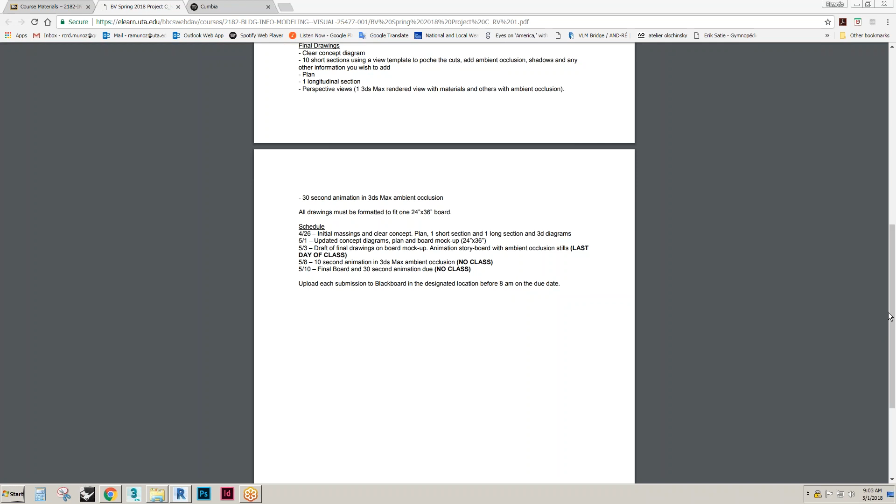Yes, okay. So I knew this was going to happen - I knew the final project was going to be affected by the studio project, because it always does every year. So if you look at the schedule, let me zoom in some more.

What I think I'm going to do is, since today's the first, I'm going to move this to Thursday. And then on the 8th, you'll have this and this due. So we're just moving that back, and I'll update the brief online - Kaylee can't hear.

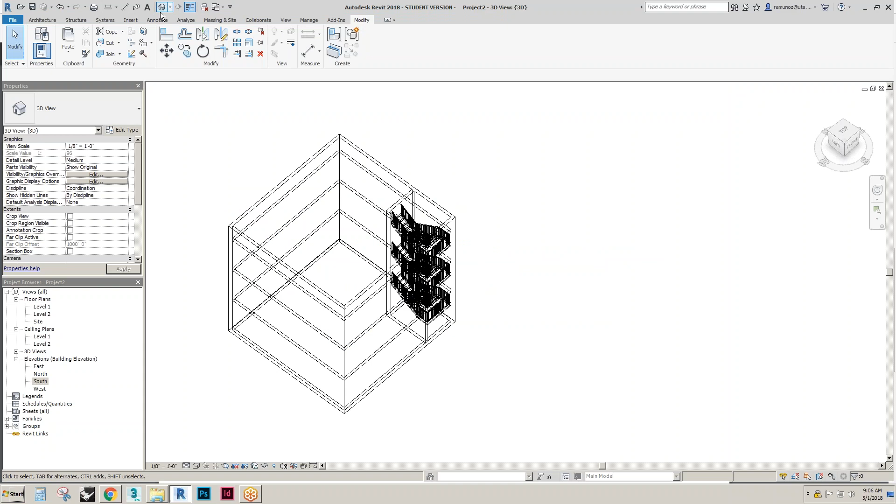So today I just wanted to go over really quickly two things that will come in handy. You don't have to model this - you can just watch what I'm doing.

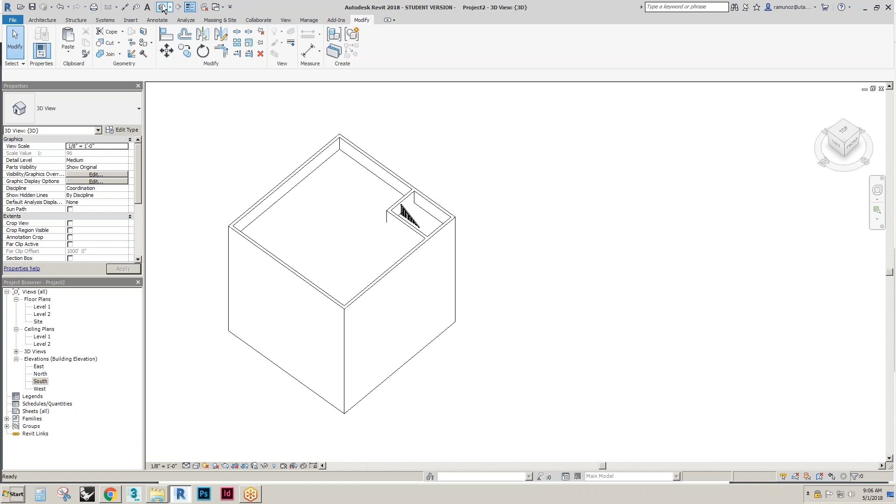So I just built a 4-story building, and it has stairs and 4 walls. It's actually a 3-story building with a 4th as the roof.

But I've been talking about diagrams, and I've been wanting you to create diagrams of what your projects are. If anyone's heard of Bjarke Ingels before, Bjarke Ingels Group, BIG - they do a really good job of explaining their projects. I feel like their projects are very simple, but they achieve simplicity, which is really difficult to do, and their diagrams are very clear.

This is their website, and these are all the projects and the years that they've done them. Let me find one that I know has some good diagrams - most of the projects have one. I don't know if you've seen this project on ArchDaily - it's like a waste treatment factory that also has a ski slope on top.

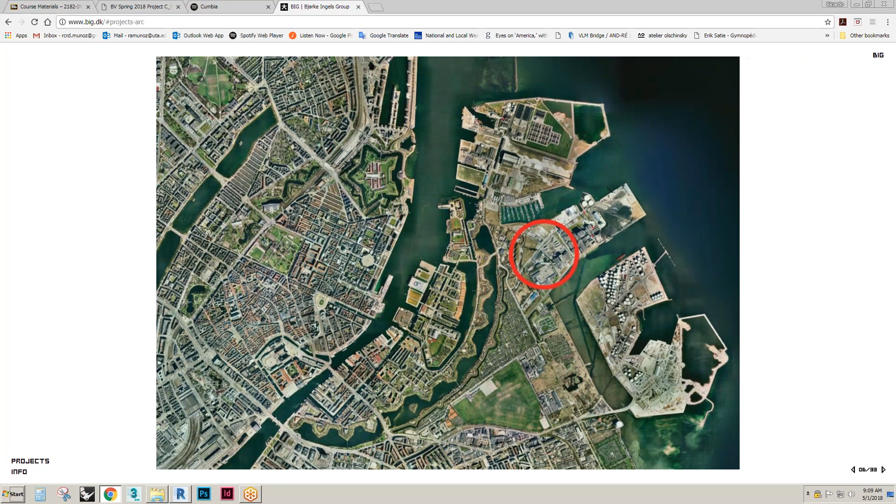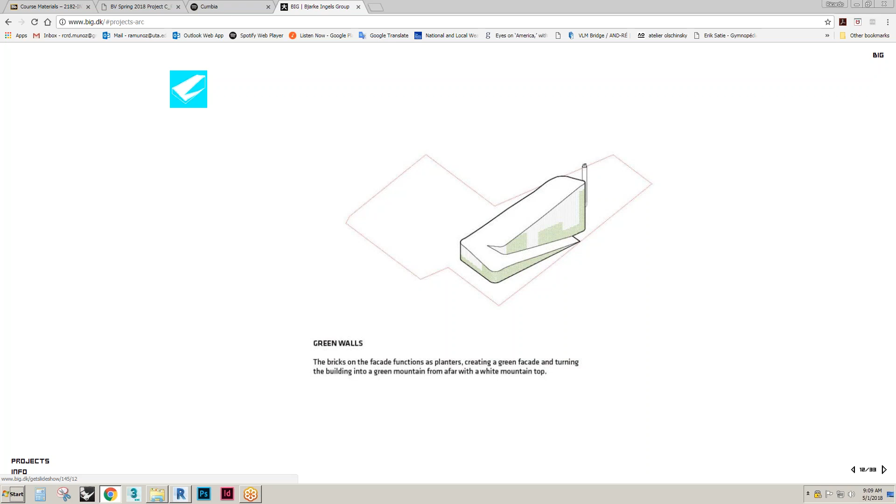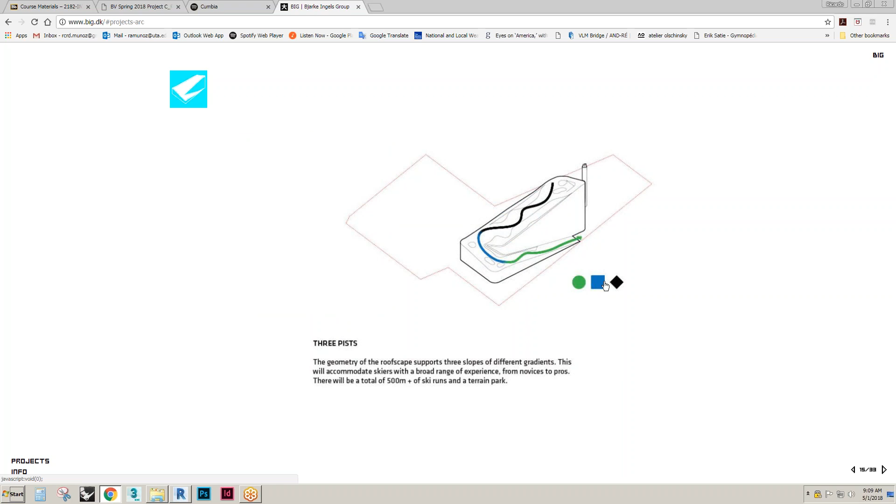Let's see this project - this is very heavy, so they start to draw simple step-by-step things of what they're doing to the project. I think we missed the first slide, it kind of crashed. But it's talking about wrapping and applying a ski slope to the top of this building, circulation, the three different types of ski paths, circulation, that it's a park and how it's going to affect the context, and they have the rendering. They're very straightforward and easy to understand.

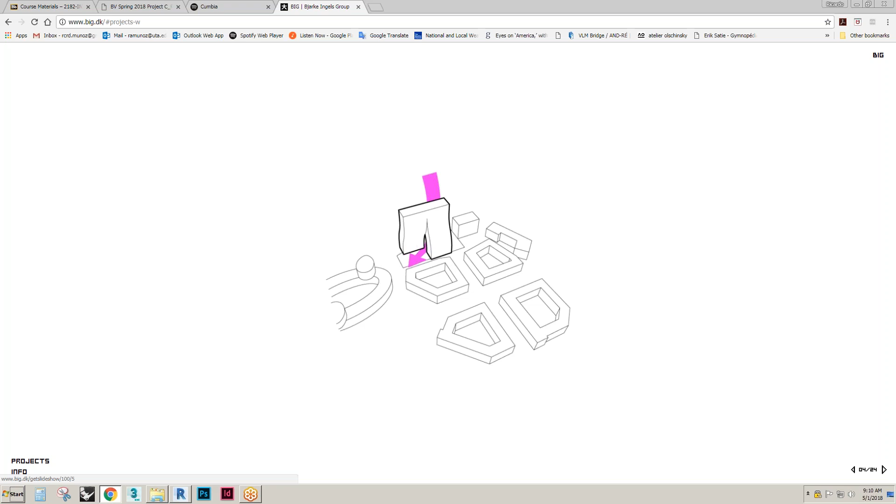Let me find another one that I remember and thought was interesting. Let's see this one. So here's a diagram of a building, and they want to make it important, so they draw these lines to show, look at me - and then they start talking about circulation and how they rotate it and split it apart, with different meanings for why it's done that way. This is a very simple diagram showing how their form comes about - that one is really straightforward.

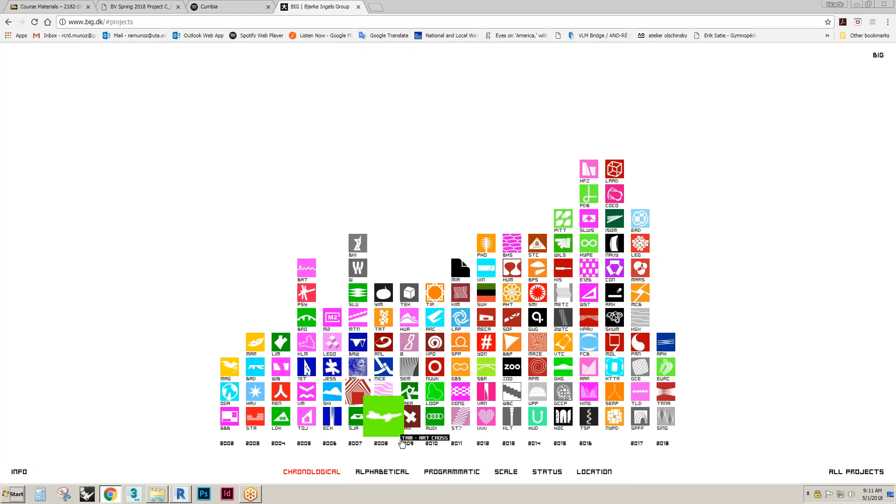Let me find another one - they used to do it a lot with their older projects. I think this is called the VM Houses - a very simple, straightforward diagram showing two bars in circulation, inflection points, and this creates views out for more people. And then they have some images of the building.

Okay, so those are the diagrams I did for that one. Again, if you want to look through their website it's kind of heavy, so it takes a long time to go through. But if you want to, type in Bjarke Ingels Group - and if you've never heard of his TED Talk, it's really good, he's a really good speaker.

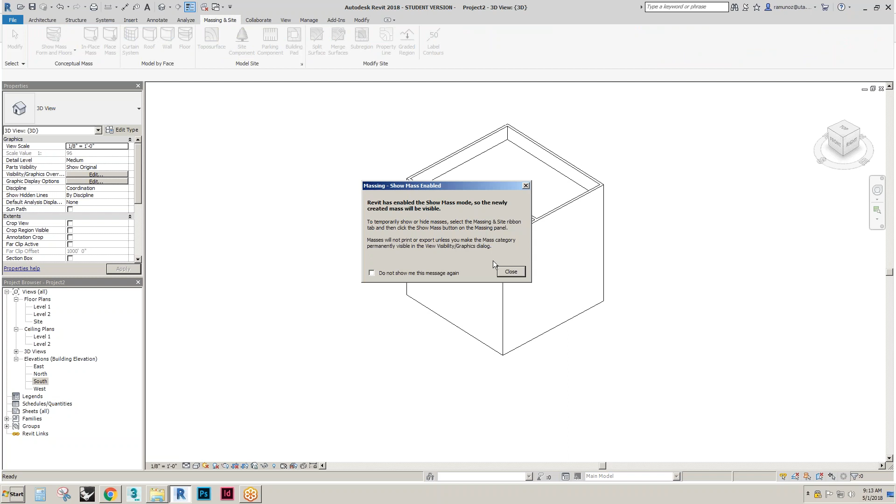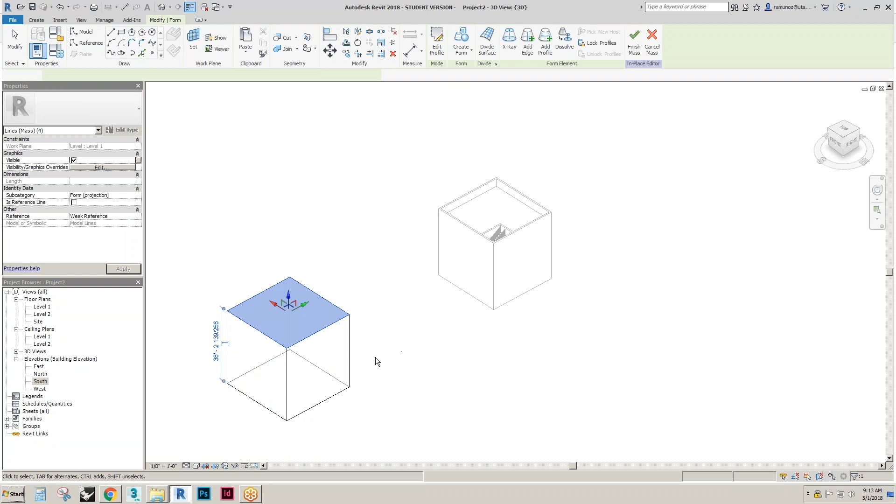Okay, let's get back to our project. So let's say you have your massing - I know your massing is a container, but I'm just giving you this example. I've also asked you to do diagrams with your initial massing. So let's say I go to massing and site, in-place mass - and it may mean that you have to do something like this. Okay, that's one.

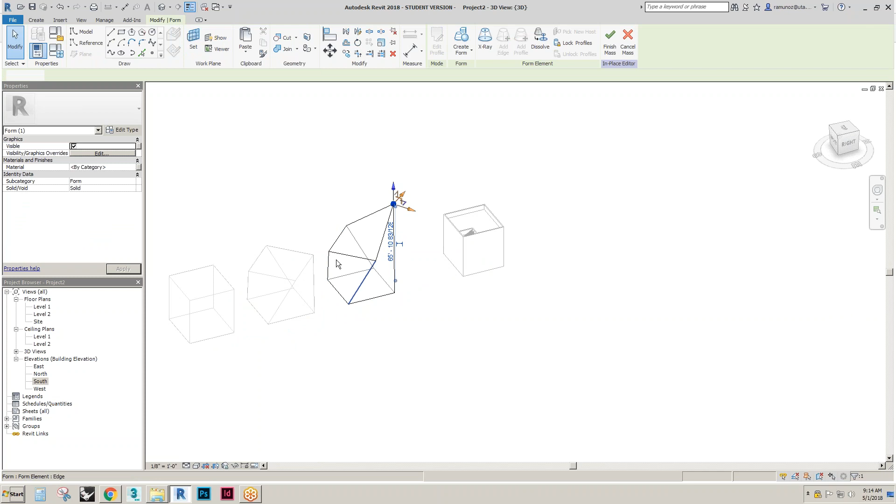Let's say your form began to evolve. Let me move this over here, and I'll do another one. So let's say these were your massing diagrams, and you had these on a sheet.

I would start to talk about why these elements are shaped this way. So maybe the first one you draw, and you have arrows or dimensions showing constraints of the project. Maybe it's the shape of the container, and you say maximum interior space, then you have arrows showing that it's rotating 45 degrees.

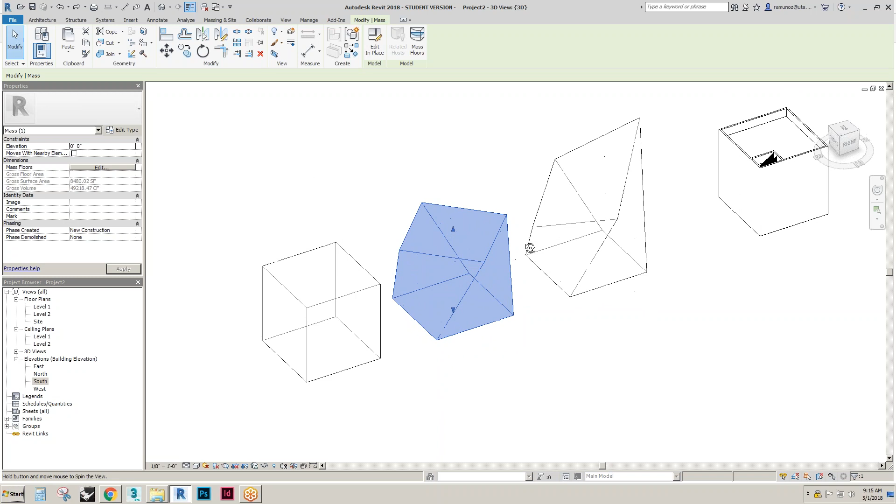Maybe for views out, or to block the sun from coming in, or whatever reason you have for rotating this. Then maybe you have arrows pointing up and pushing down, explaining how, maybe this points to something important, or maybe you want more natural daylight to come in. But you do these simple diagrams to create that drawing, and then at the end you would have your finished building if it looked like that.

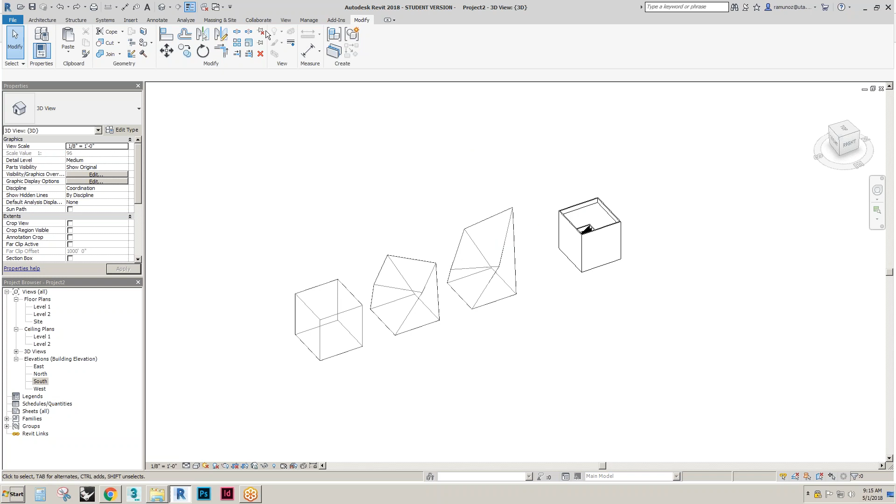So let's put this on a sheet. I'm just using this one here, and I'm going to copy my 3D view in. I'll change the scale.

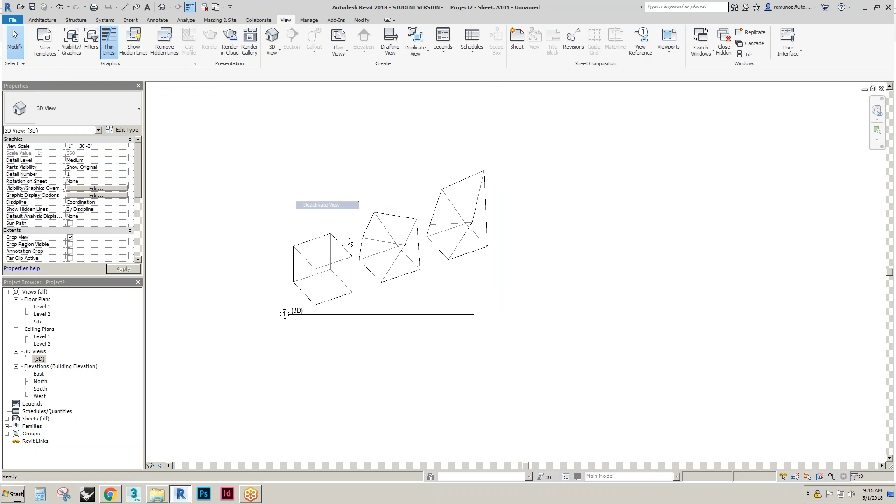Actually, I want to hide my building. And let's say I give this no title, so it doesn't have anything.

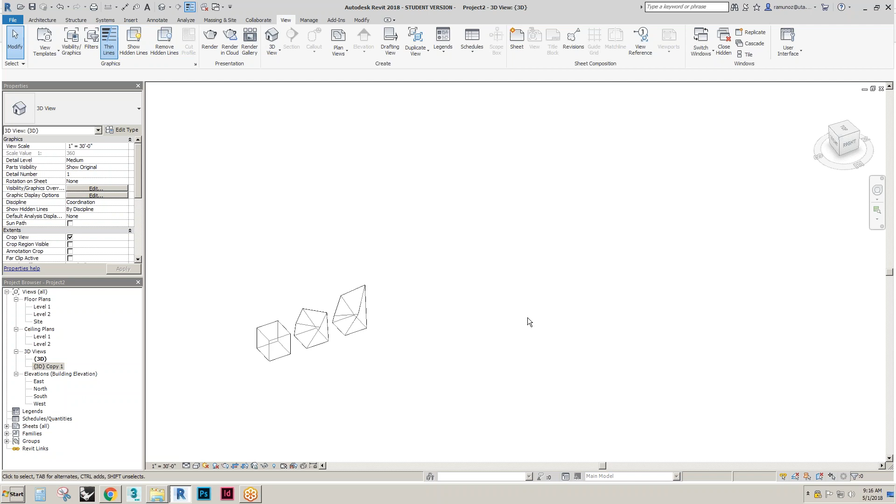And then I'm going to duplicate my 3D view, because I want my second one to have my building in it. Go to my sheet.

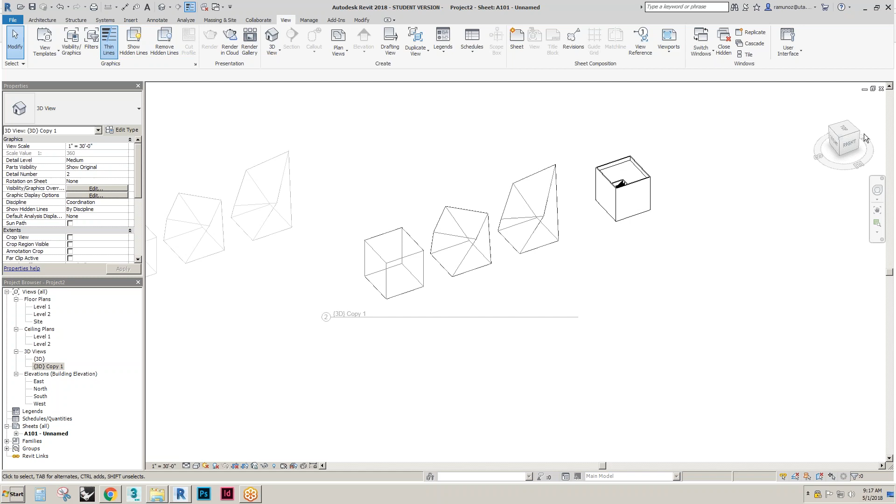Maybe this one will have... okay, I'll hide these things. Maybe I'll make this bigger.

Your sheet would be composed nicely. So let's say we have some massing diagrams.

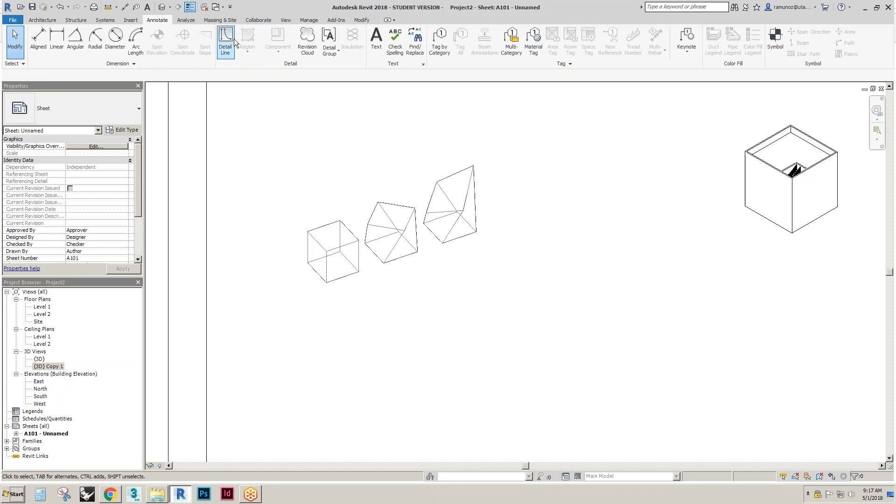When you are in a sheet view, you can go to the Annotate tab, and you can start drawing lines. You can start drawing lines that are sort of, just using the Annotate tool, you can start drawing things to describe different elements.

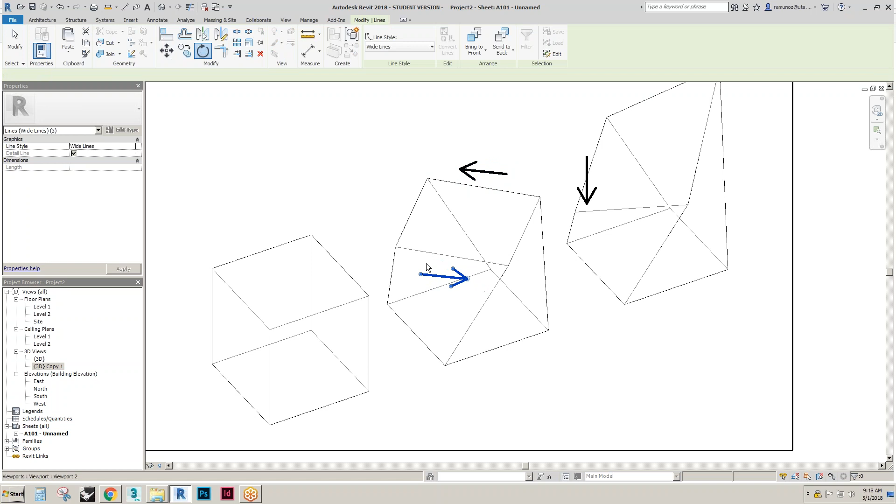So like in this case, maybe I'll do something like this. That's very simplistic.

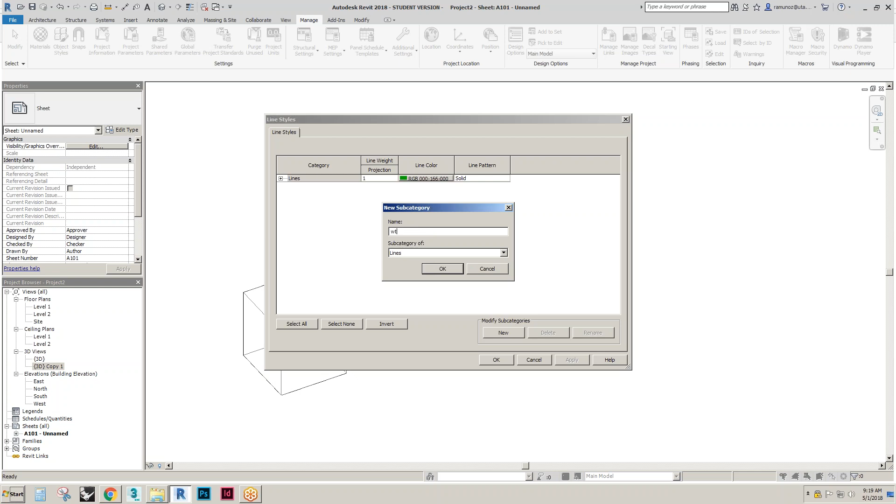And of course, you can create new lines, right? So if we go to Manage, Additional Settings, Line Styles, create a new one. We'll say like WT for weight, we'll call it WT8, and we'll give this an 8.

So now if I draw a line, it's in proportion to what your drawing is. But you can, you know, make these different colors. So I can make another one.

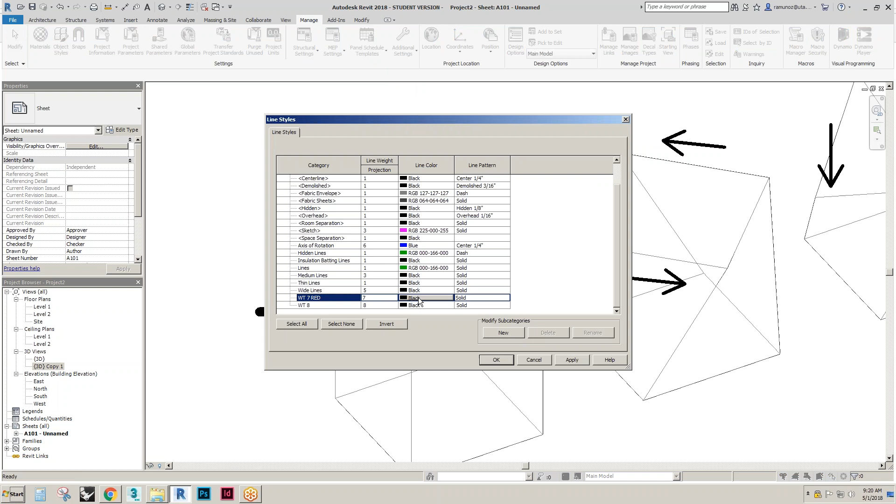Annotate, sorry, view, actually manage, additional settings, line styles, new, I'll call it WT7 red. So I'll make this 7 for line weight, and I'll make this red. And I can make this a red line.

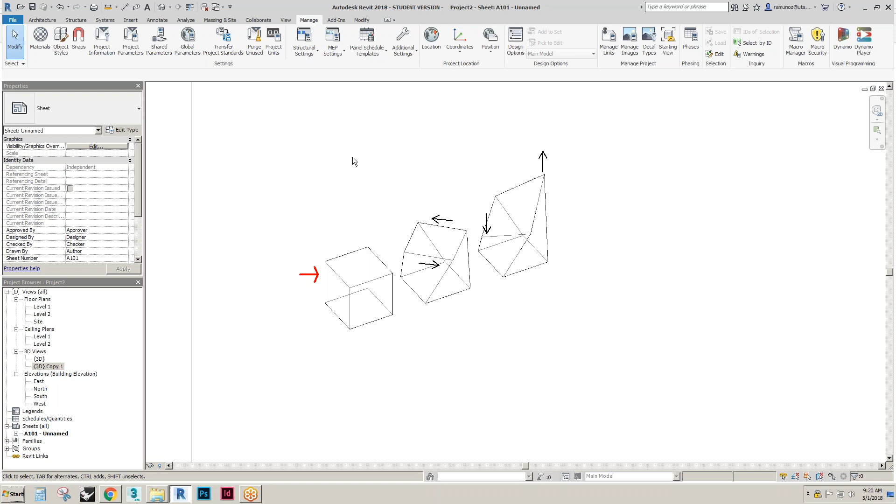Now you can do these things in InDesign as well to create lines, but if it's simple and you're going to keep it in, if you lose one step—in other words, if you create the drawing, export it into InDesign, draw there, and then realize something was wrong—you have to go back to Revit and do it again. And if you could cut out one step, it would make your life so much easier.

So those are drawing some lines, and of course these can be hatched by the type of lines. I mean, they don't have to be solid, they can be dashed or whatever other default is set there.

Another thing I want to show you is that a lot of times in those drawings we saw earlier, the building has a thicker line weight, and you can do that. The perimeter has a thicker line weight because it sort of makes it pop.

And you can do that in two ways. You can either draw thick lines over—I'm not in the view, I'm in the sheet view. I'm not in the view right now because, as you know, you can't draw an annotated line in a 3D view. So what I'm doing is basically just tracing over it.

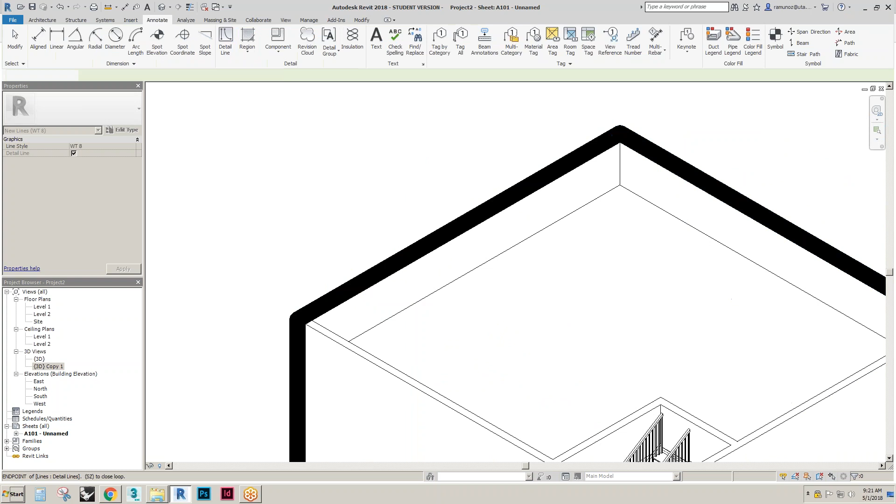And this is a very simple form, but you can see that I traced my object and it makes it pop away a lot more.

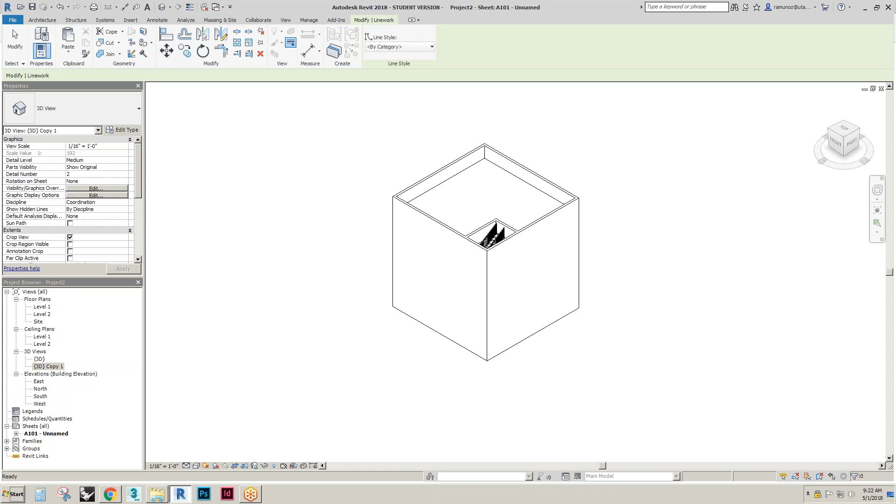Another thing you can do is double click in your view and use this tool, which we haven't used before. It's under the Modify tab, it's a little 3 lines with a blue arrow, called Line Work, LW. Click on that, it's selected, then choose a line style. Let's say I choose WT7 red. So I have that clicked and I choose a line style.

I can click on lines and it'll change their line weight. So I'm clicking on edges and it's changing their line weight. You see what happens here, since this is a wall, the wall ends there and the other one is there. You get these kinds of edges where you can't really select this line anymore, but you get this edge, and then a little blue point that you can stretch. Okay, it didn't let me do it.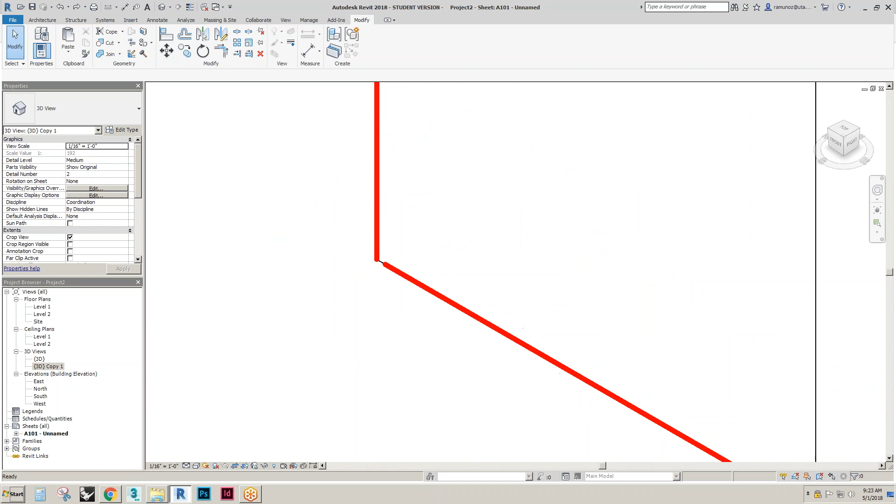Let's try it again. Okay, WT red, this all here. What I want to do is hover over that red line. Oh, it's not letting me draw it that way. It's letting me make it smaller, but it doesn't let me go past this line, so I just have to click on that edge.

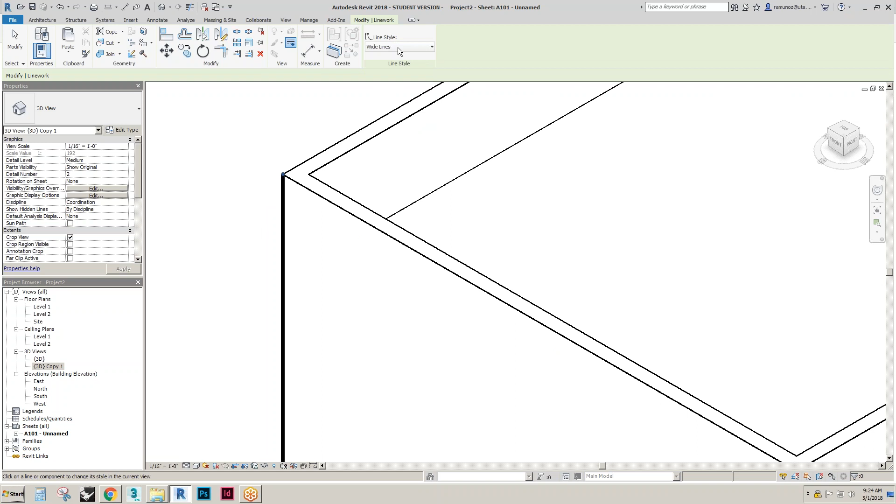And if you want to get it back to what it was originally, what you have to do is click on the original line and click on that line again. So there's not a reset tool to get it back to normal.

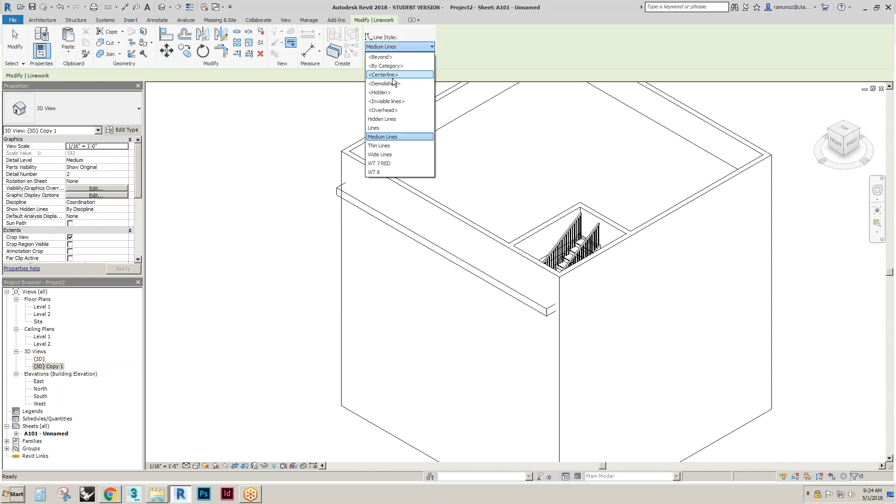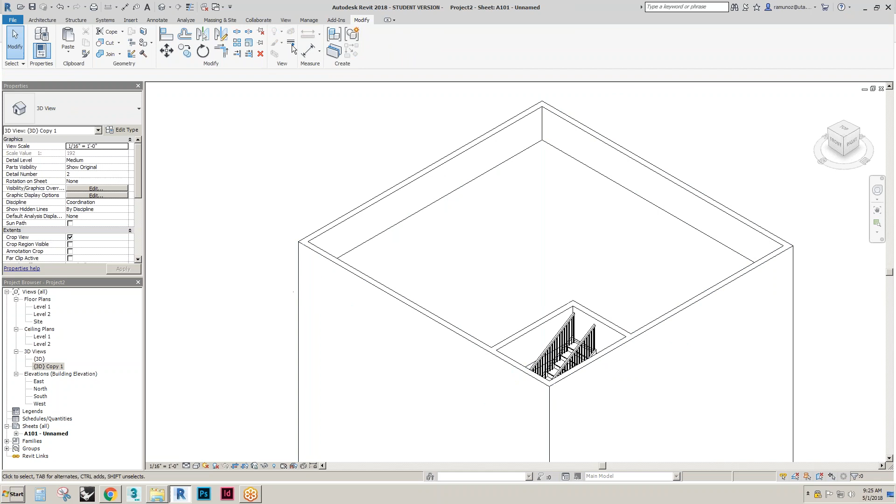Another cool thing you can do is, let's say the slab accidentally sticks out somewhat like this. If you use that line work tool, you can select invisible lines and then click on lines. Let's say you have a mistake, you can hide lines that are problematic. In this case, I'm going to hide this one, and it's going to hide all of this over here, so I'm just going to tell it I only want you to hide like so. So there's my slab, but I'm actually hiding the line work by using this line work tool. Pretty cool, huh?

Crickets. Just kidding.

So those are some tools you can use, and again we can do that here with this line work tool. Select the thick line weight, select the WT 8, and start to outline our building's different components. It really gives it a graphical pop quality that is really nice, having line weight. A lot of times we hear complaints about drawings not having line weights, but this would be one way to do that.

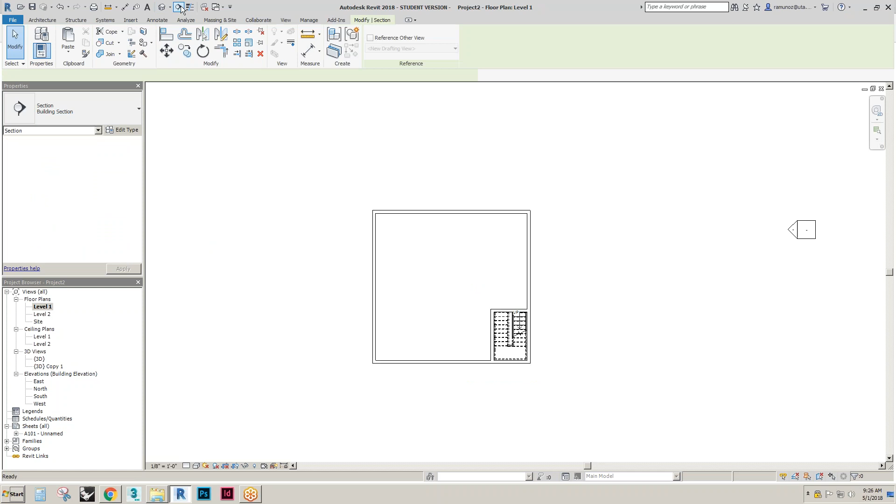Okay, another thing I want to show you is how to create a color field. I forgot what it was called in Revit and AutoCAD, I think it's a hatch pattern. But let's say I want to cut a section to this building. Use the section tool, start, end. All right, go to section.

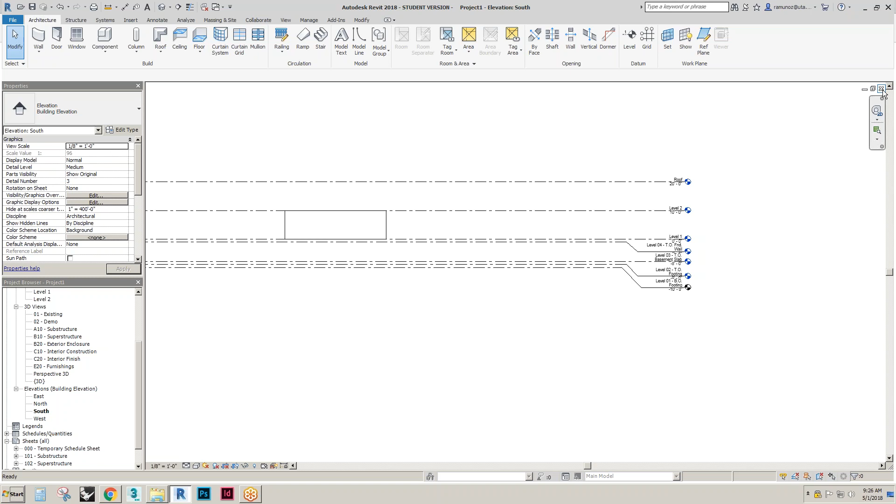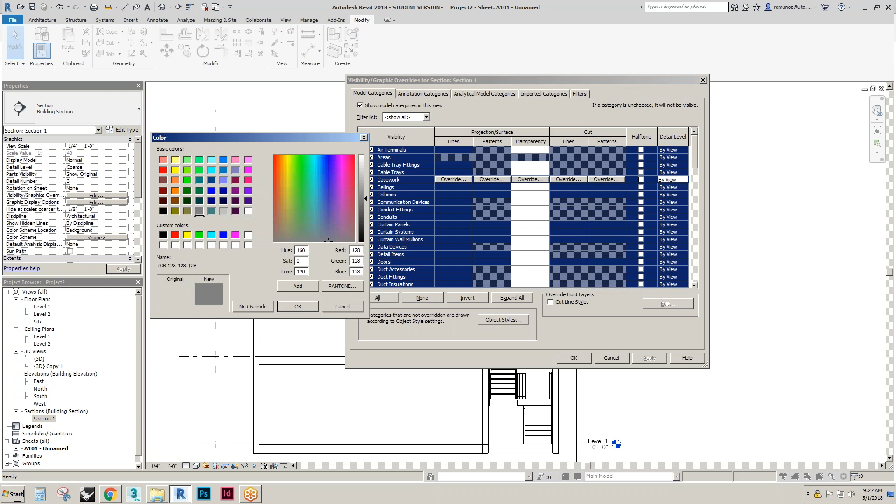So there we have our section. I'm going to drag this onto my sheet. There's my sheet. So of course we go to VV, select all, and go to the cut patterns. We can crosshatch everything, and if we select all we can give it a different color or whatever we want. Make this yellow.

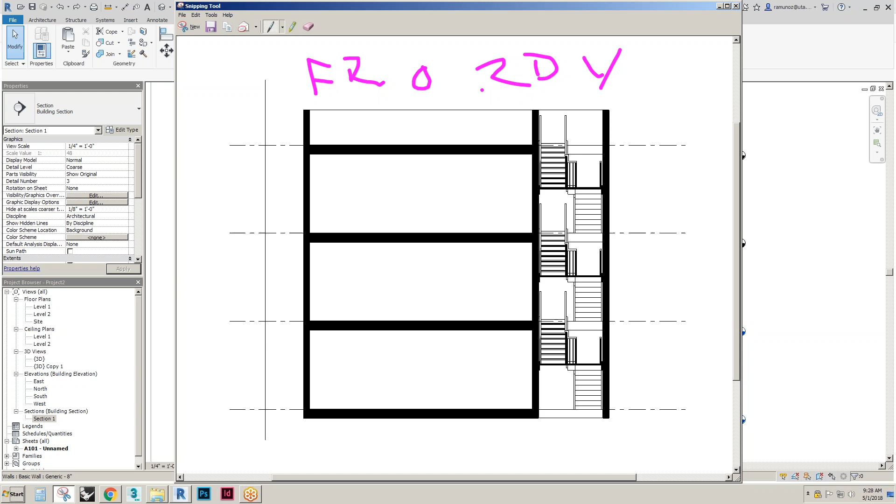But let's say you want to diagram different areas with a different color. So what I'm going to show you now is called the filled region. Let's say we just put a layer of color over this so that it becomes a certain color. So first, you have to be in a 2D view. Let me draw this so you remember: filled region only works in a 2D view. You can't do a filled region in a 3D view, just so you remember, only 2D.

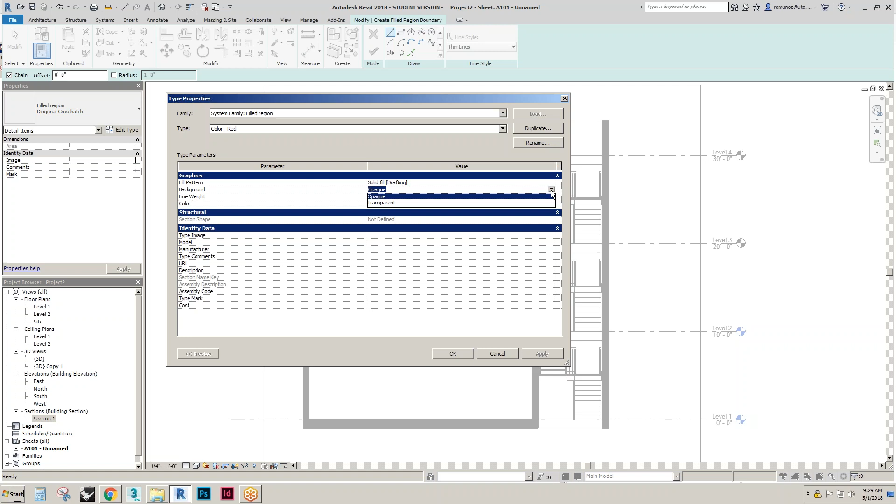So plans, sections, elevations. Now we'll go to the annotate tool and select filled region, select this region tool here, select filled region, and we're going to create our own. So we can select edit type, duplicate, and I'll name it like this, color red. I'm going to choose the color red, and as my fill pattern, this is like creating a pattern for anything you've created before, I'm going to select solid. And my background, I'm going to select transparent. So then I'm going to draw a red rectangle.

And I'll hit finish, and now I have a red area that, if you hover over it, you can modify its shape like this. That's the red filled region. So let's make a couple more, yellow, blue.

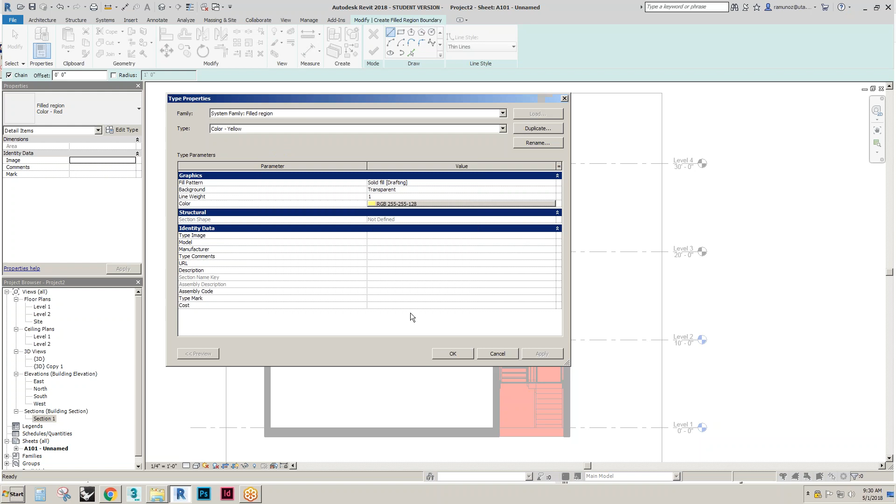We don't need shadows, but let's create a couple more the same way. Go to annotate, filled region, edit, duplicate, we'll call it color yellow. Same thing, transparent. In this case we don't have anything in that room, but if we had a furniture piece in there, there's a furniture piece. So we can start highlighting, and maybe half of the room is dedicated to one program.

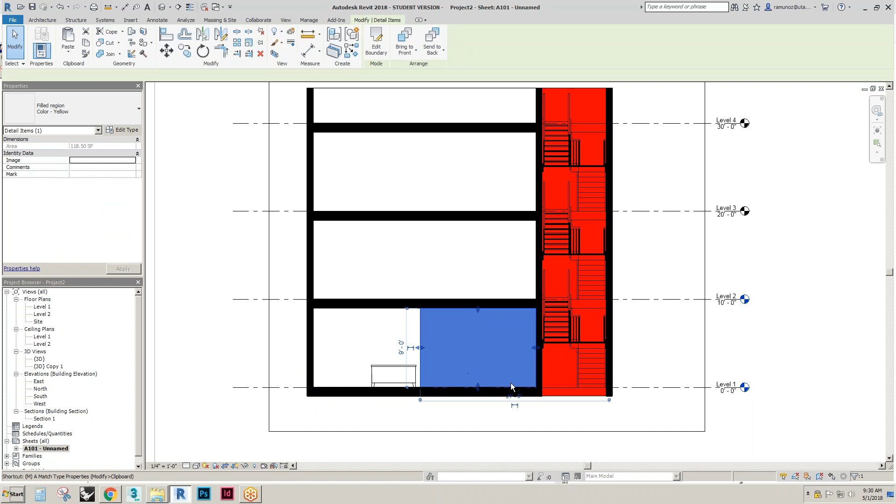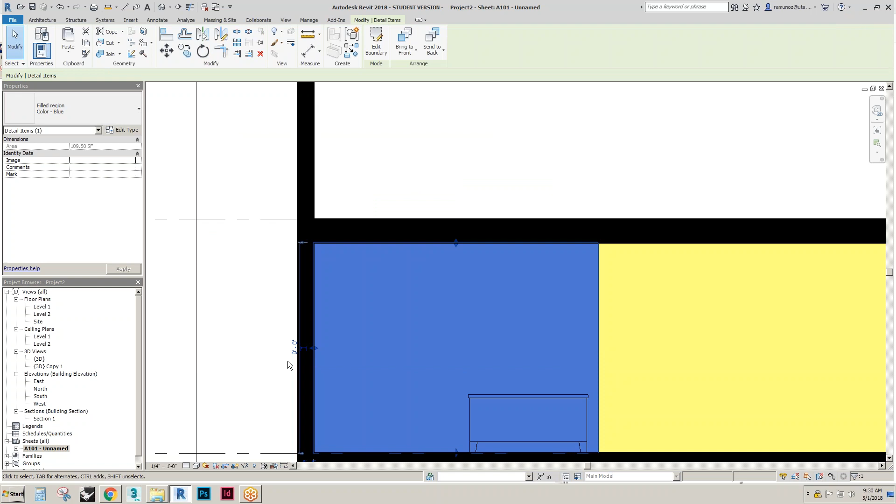Another one is dedicated to another program. You can start doing diagrams of this is this region, that's that region. And these can be any shape, it's just the shape that you're going to draw. It can have an opening, and you can modify these after the fact. So you're just creating a polygon shape. That can be pretty useful.

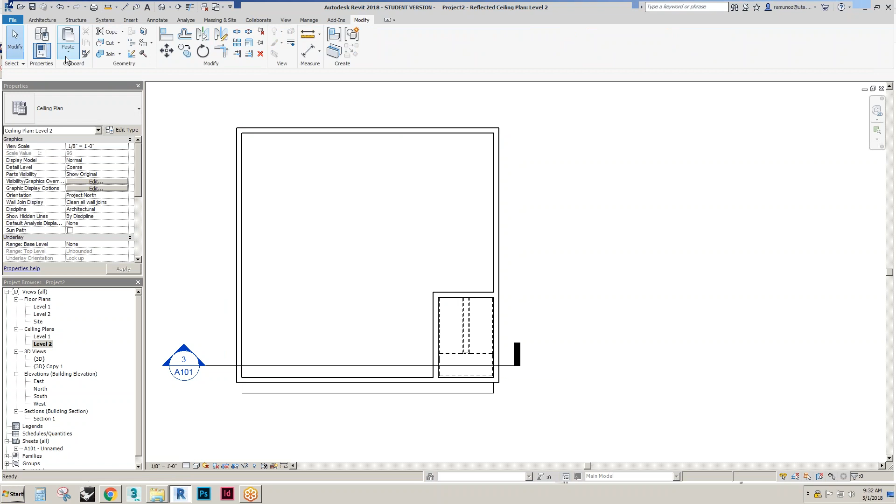And we can do, like, a solid one. Let's say your ceiling, let's say we have ceilings in here. What is our floor? 10 feet. Let's say our ceiling in this building, sketch ceiling. Okay, I have it on level 1. We'll replace it on level 2 as well. Go to my sheet, so we have our ceilings in there, and that's just empty space.

And in the type of sections that you guys are drawing, I don't want to see that. I don't know if your container project is going to have a plenum space like that, but you can make a black filled region, and just fill that in so it looks poché, right? So annotate, filled region.

There's already a solid black one as a default. Another cool thing is that you can draw multiple shapes within the same filled region, so it doesn't have to be one thing. You see I have one here and one there. So now this is poched. Here's my filled region. And now we're just drawing the space as it would be experienced, right? The ceiling would be right there.

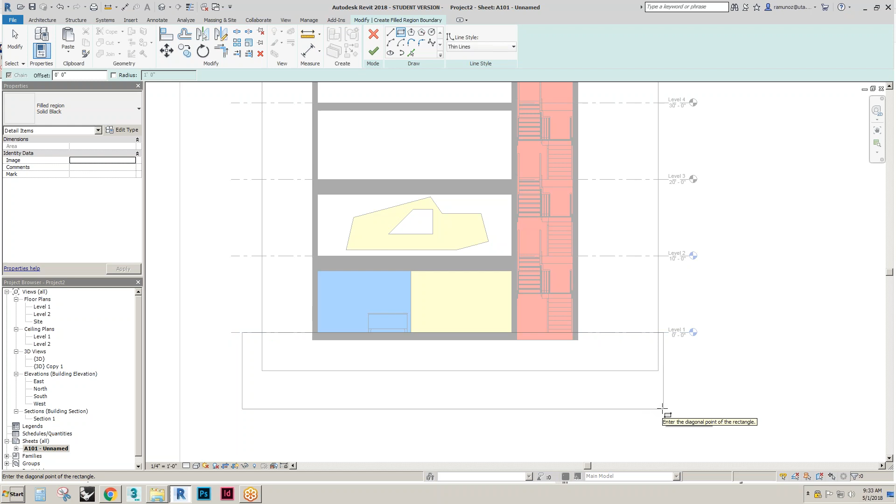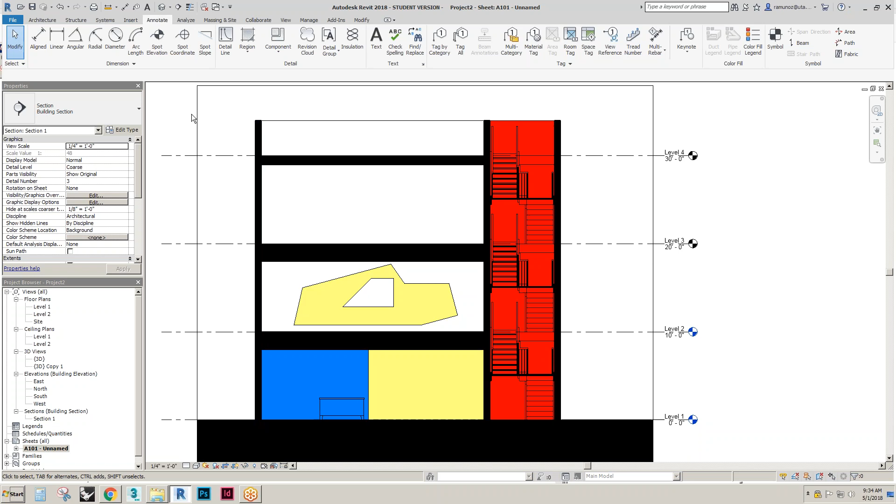And let's say I wanted to do it to the ground plane, to make it look like this building is grounded. And there we go, so now we have a poché drawing. We can turn on shadows if we wanted to, just make sure that the lighting works with your scene. Everything's in shadow, so I don't think I would. But that's a very fast way of diagramming.

Instead of doing it in Photoshop or Illustrator afterwards, you can just create these filled regions. The only thing that happens, and a lot of people don't like using filled regions, is if your building changes shape, you have to go in and move your filled region. So if our floor to floor gets bigger, let's say our level 3 and level 4 move up a foot, you just have to be cognizant of what you made as a filled region and adjust it.

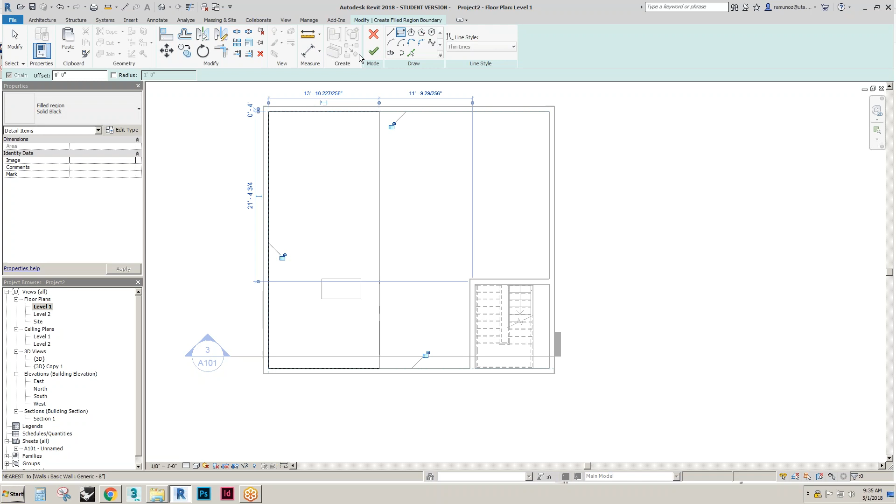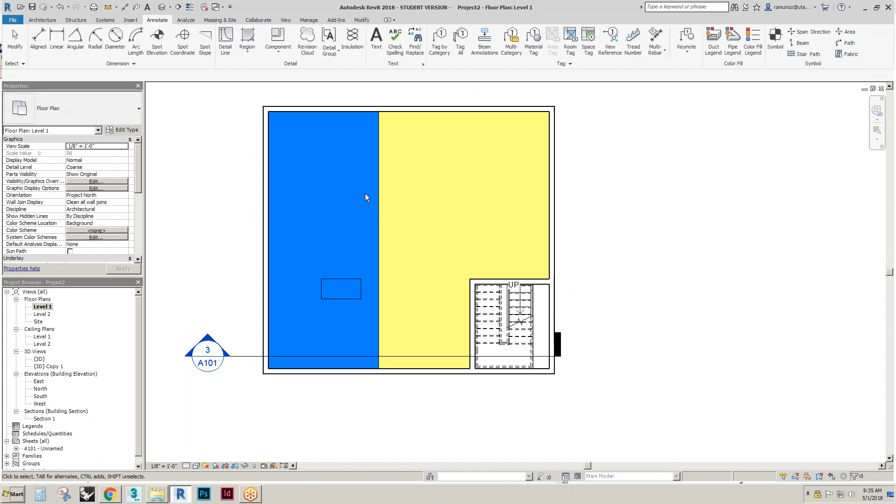Now, if you're drawing floor plans and you're trying to distinguish different areas, you could use a filled region like this, right? You make this red, blue, and then this is yellow. You can start to diagram it that way. But again, I'd be careful, because if this moves, you have to modify this. So for future projects, I wouldn't put a color blocking with filled regions.

I would just make the floor, like how we did before with the thin floors, that you make a floor that's like 2.25 inches and it's hovering. I would make that, because sometimes these floors stick to the walls, like you see there, the floor stuck to the wall when I moved it. And it's more permanent. Also, if the building moves, the floor would come with it, and the filled region really doesn't do anything.

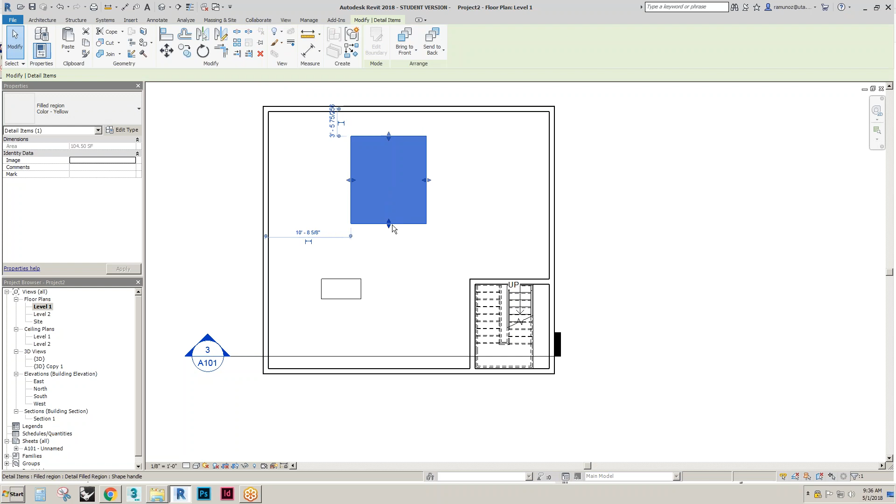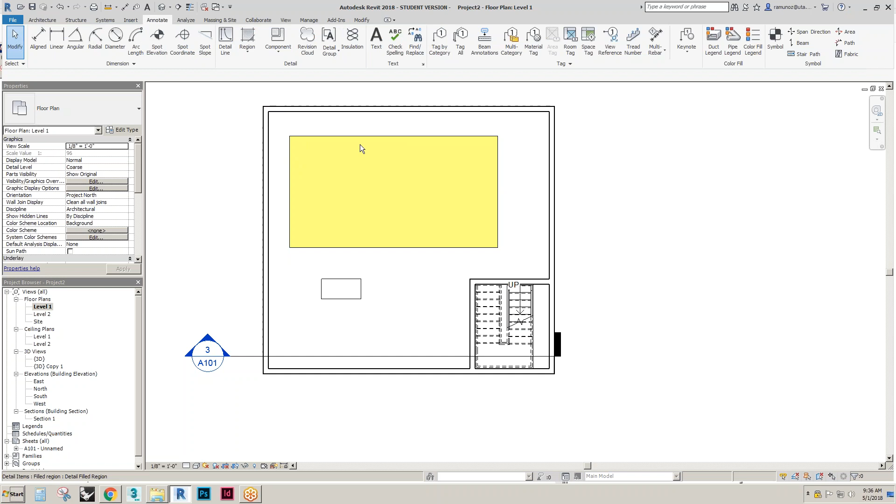One last thing with filled regions: when you draw one, it calculates the area, so you see it says area there of this rectangle. You can modify it live, but like I showed you before, you can make schedules out of floors, so you wouldn't have to click on every filled region to find out the area and then tabulate it. If you make it smart, you can just make a schedule with the floors, and you don't have to calculate anything because the math will already be done for you.

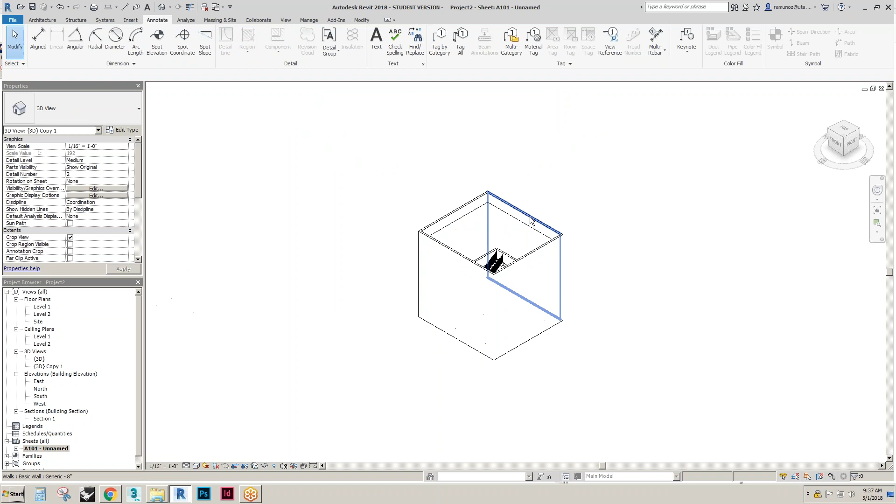Okay, one last thing, let's go back to the sheets. So like I said before, you can't draw a filled region in 3D. I'm in my 3D view, I've activated this view, and you see that filled region. If I go to annotate, it's grayed out, it won't let me select it.

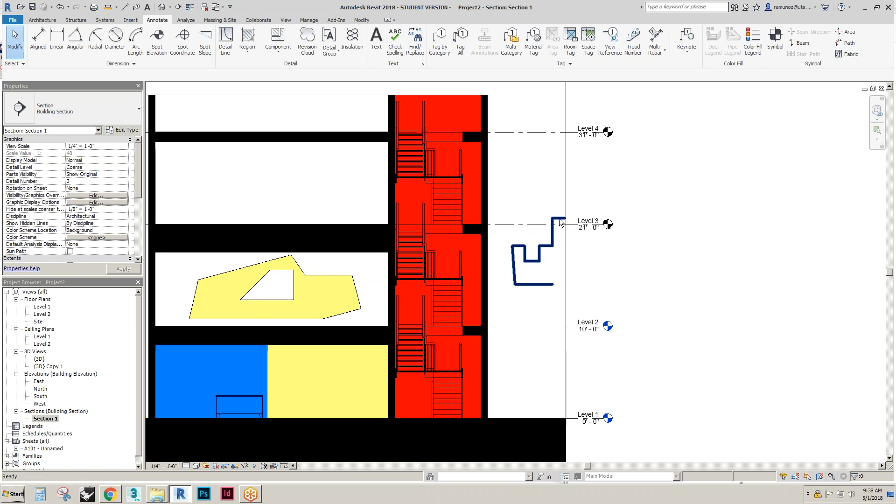A trick you can do is create a drafting view, which is something we haven't done. Drafting views are typically views we create that are just annotated lines, detail lines. So if we start drawing in our floor plan, or let's say we're drawing a section and we want to draw a detail, like the way something meets the floor, drawing a detail section of something, a cabinet or whatever, drawing it in the 3D world is too much information for what we need.

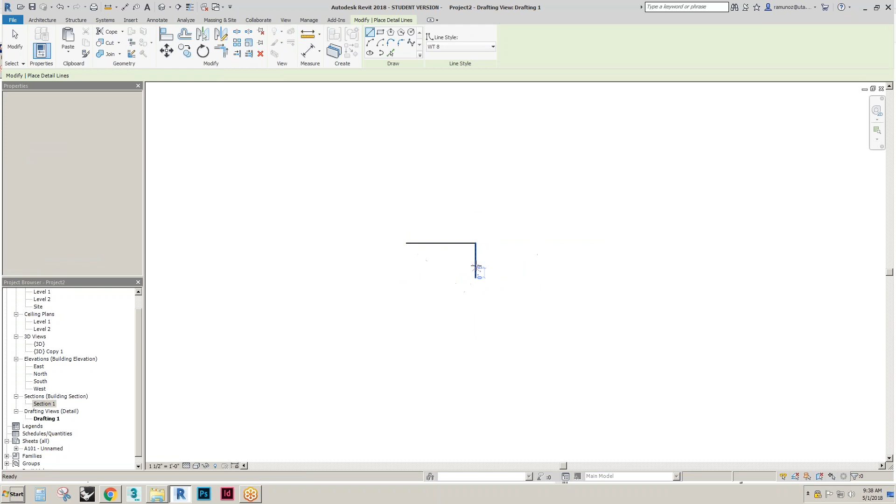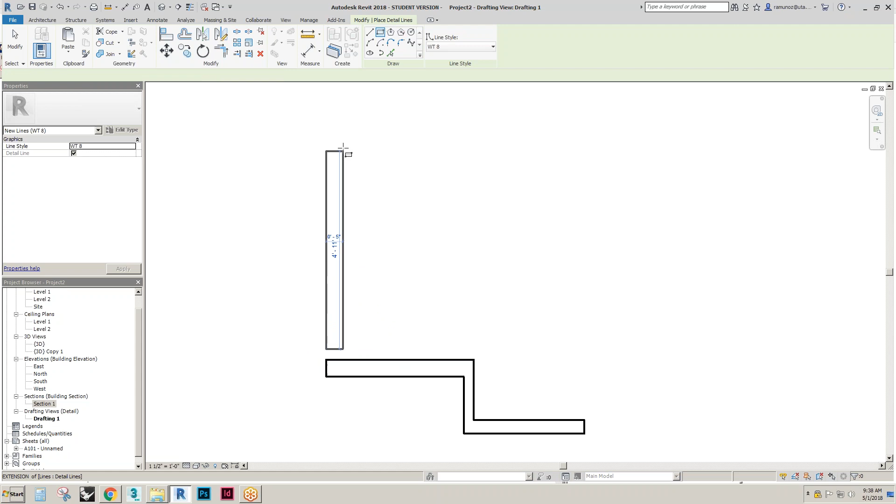So for a drafting view, we go to View, Drafting View, and you can choose a scale. It's fine right now, and you see that it appears here in your project browser. The drafting view is where you would create, if you're drawing the cabinet millwork, here's a toe kick. This is out of scale, but you could start to draw how this thing's going to be put together. Again, this is out of scale, but let's say this is a door, and here's another, here's a shelf.

And then we can start to annotate this. You know, this is that, or whatever. So that's what you would use a filled region for, I mean, a drafting view for. But what you can also do is drag this onto your sheet. So let's go back to our sheet view. Drag a drafting view on here.

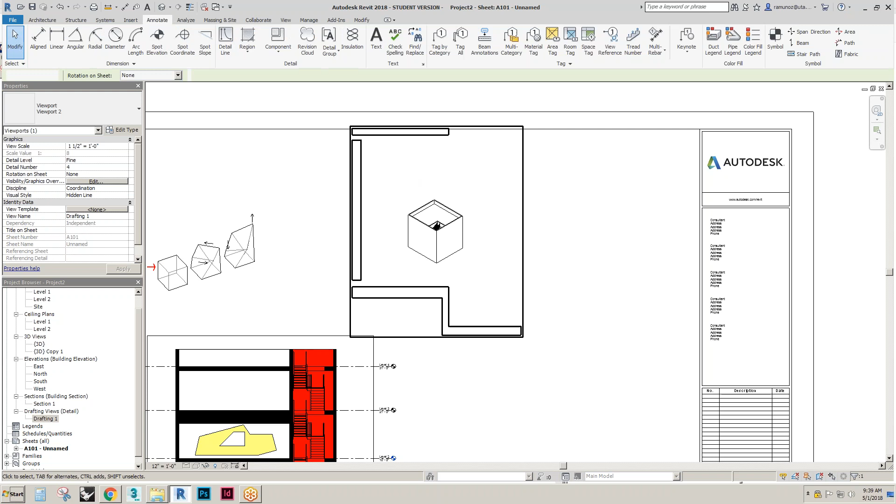And I'm going to give this no viewport. And then you can draw a filled region in this drafting view. And this is on top of that view. I'll show you in a second a little bit better. Let's say I want to diagram this stair in a 3D diagram.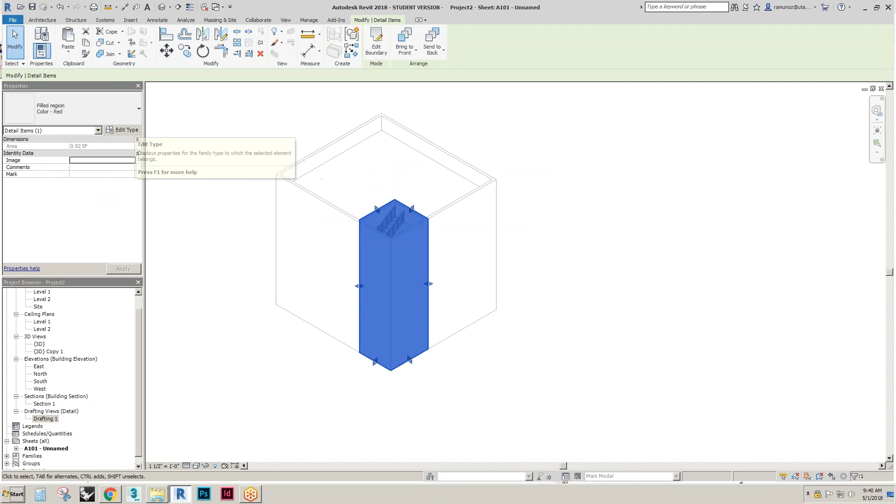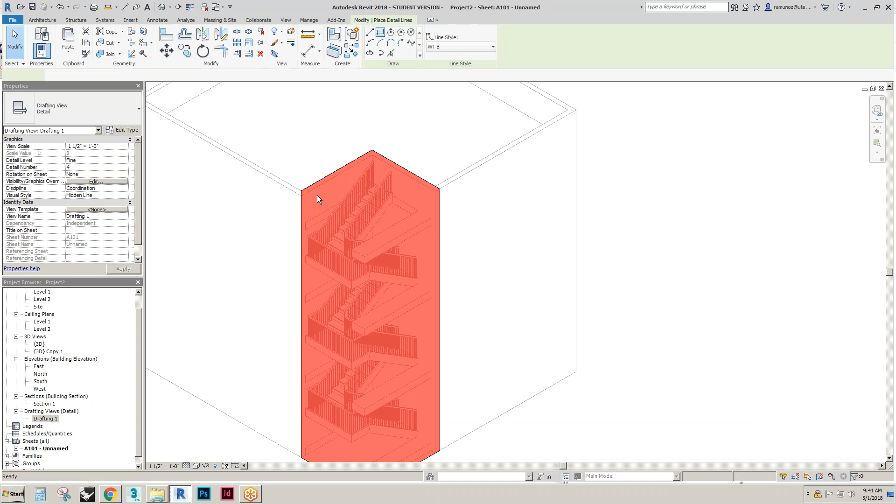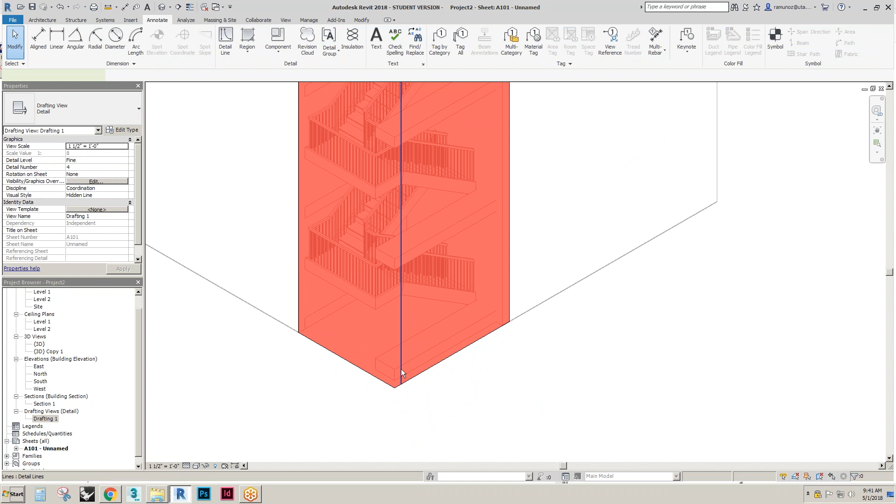Can't be all the way transparent. And here, I can make this go like this. Doesn't modify the building, but you can start to diagram. You could even keep drawing these lines just to show where the edge of the building is. So you want to keep it.

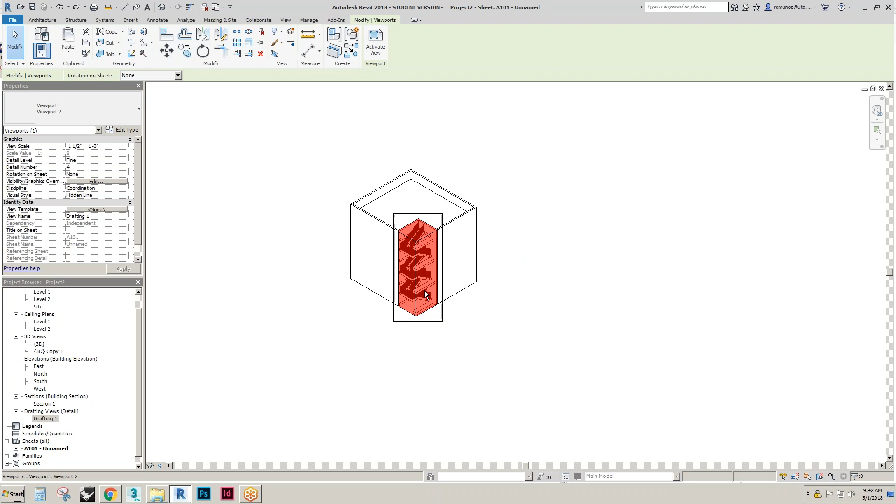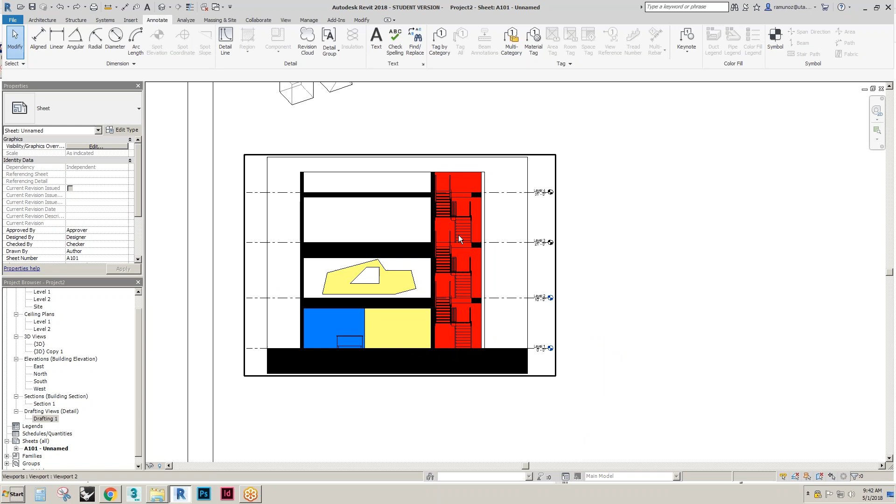So what's occurring here is that I have a drafting view that I dragged in, layered on top of my building. And in order to get it transparent, I had to select that filled region and override it. I overwrote it this much, 40% or something, so that you could see through it. And that way I can draw a filled region if I needed to in 3D. But if not, then in 2D it would work.

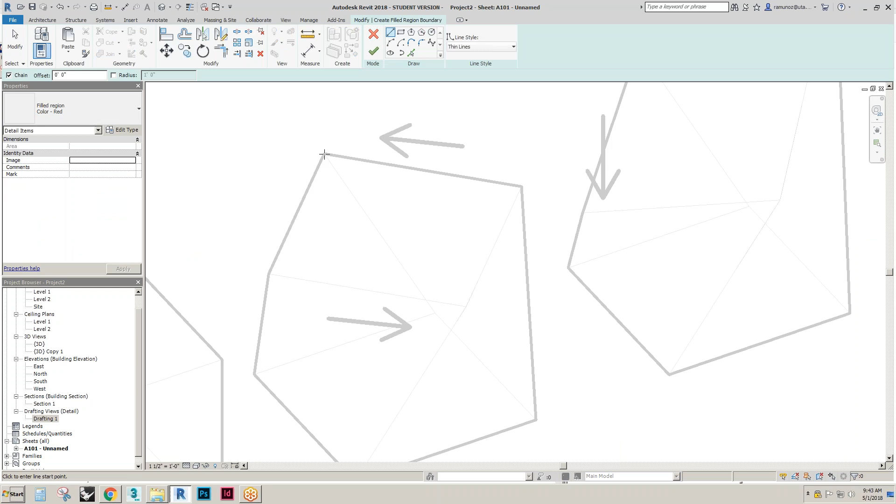I could also come in here and draw a red line on this one. Or maybe I just want to highlight. Let me edit this one so that I'll just create a new filled region. Maybe I want to highlight the top of this building, just one face.

And I'll override it so that you can see the line work coming through it. And so then I can highlight different faces or different sides or do whatever. But this, again, is saving you one step. If you set up your sheet, you could do it several ways where it just depends, and as you get older you'll become more efficient for sure. But you could be in Revit, right, and you could export individual views.

And then Photoshop, and that's where you do your color and your arrows and whatever. That's one way. Another way is that you start in Revit, you lay everything out in Revit, so you lay out a sheet, and then you take it to Photoshop or InDesign or Illustrator and do, again, the colors for everything in those softwares.

And then another option would be just to do Revit all the way through. So you do your modeling, of course, you lay everything out in Revit and do your line work and colors in Revit, and then that's it.

And so you can avoid all of these steps of, let's say you get to this stage, if you're doing this method, you get to this stage and you realize that some line is wrong, and then you have to try to fix it in Photoshop, but then it's bigger than you realized, so you have to go back into Revit, put it into InDesign and then Photoshop.

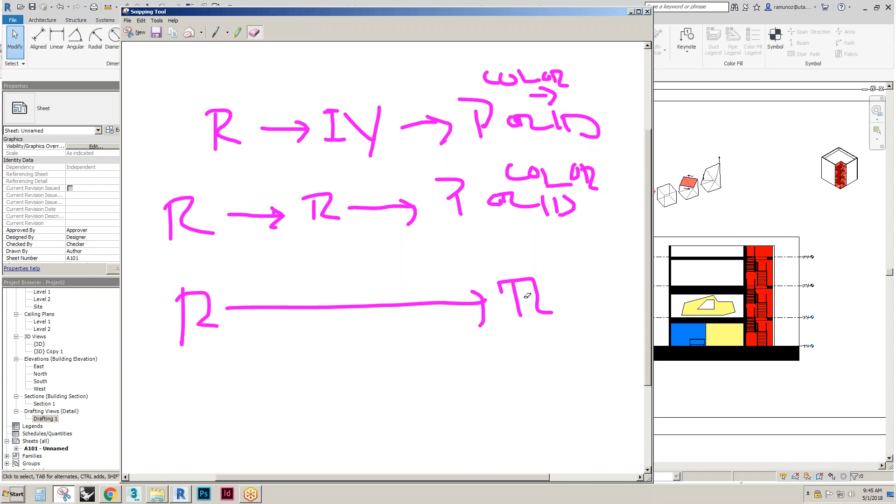It's just a lot of steps that you have to track, and if you have to keep correcting stuff, it'd be easier just to have it in one, which you undoubtedly will probably have to go back at some point, because it's kind of difficult to know what the end result is until you start laying it out.

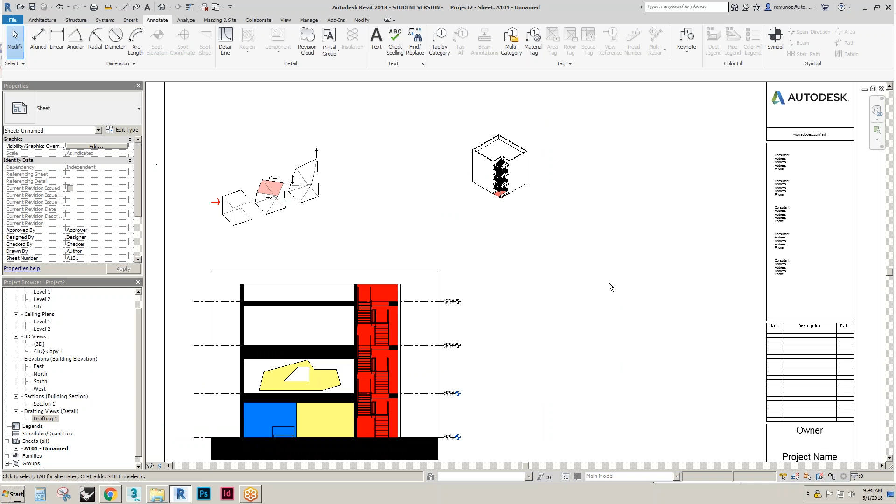So those are a few tricks, graphic things that I'd like for you to use on your final assignment to show how your form is evolving and what colors come from what, what areas relate to what, and I think you can come out with some good drawings.

And this diagram that I did earlier, I'm saying that you can do everything in Revit, but obviously if you wanted to go through InDesign, that's fine as well. I'm just showing you that you probably could do it all.

I'm still not happy with the color selection in Revit. I mean, you can choose any color that you want, you can make any color. But I still think that the color works best in InDesign, where you can be more precise. There's just something that you can control a little bit better in InDesign.